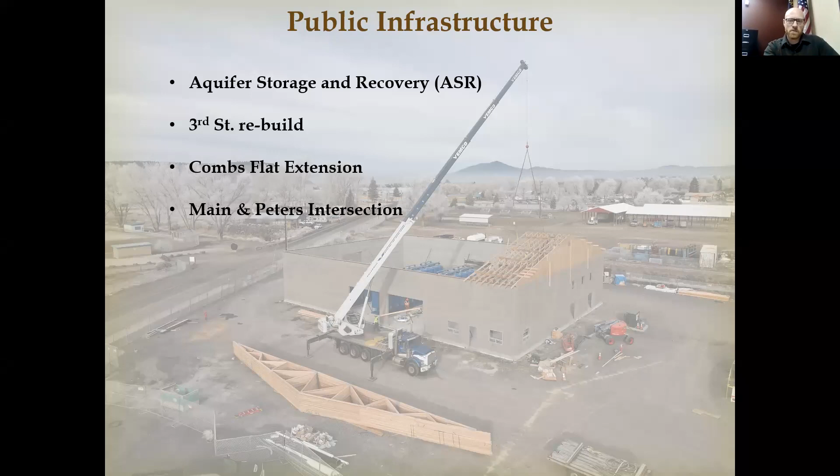But we don't have typical customers here with the data centers. They require a lot of water at very short periods of time. They don't use a lot of water, but when they do, it's a huge spike, and we need to be able to deliver that water and have the capacity available. So what we've created was this aquifer storage and recovery system. You can see the building in the background being built. This is a treatment facility down south of the fairgrounds. There it is. That's what it looks like today.

It's a drone shot of a treatment facility, and right on the other side of the street is a series of 20 wells, 100 feet deep, and they supply. We push the water through here. We need the treatment facility to take the manganese and the sulfur out, and then this allows us the capacity to push water up the hill and bring it back down. We can now pump water up onto the grade. We can now let it into the town. It's more than just this system. We have pipes going up the grade.

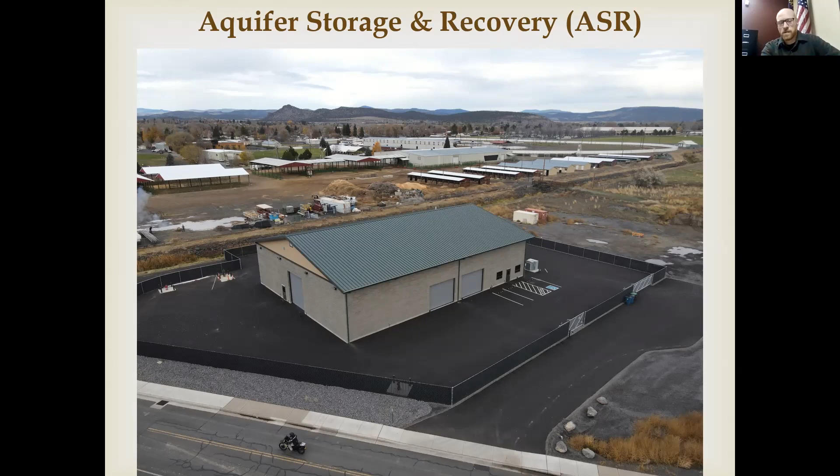But the key point of the aquifer storage and recovery was to provide water storage when we don't need the water, and then pull it out, recover it when we do need it. And so it's a very unique system. We've got a lot of different awards for it. It's not unusual. It has been done in other places, but it takes a very specific geology in order to make this happen, and we happen to have that here in Prineville.

So in the wintertime, we pump water up onto the grade and pump it into the airport wells. Our aquifer is confined, and so it actually balloons up. It creates a bubble underneath, and it allows us to store an enormous amount of water, where our normal water tank is 1 million gallons. That's a normal tank you see in any town USA. This has the potential to store 400 million gallons. Now, we may not ever reach that, but that is the theoretical capacity.

And in the summer, we can pull that out when the aquifer recharge is really low and the river's down, the reservoirs are down. We're using groundwater, not surface water, but that recharge isn't there. So we do slowly pull that water down. I don't know if you can see that on the side there, this is kind of a little chart, but the important part is you see all those lines on the bottom. Those are our yearly recharge. You can see how it gradually recharges over the winter, and then we pump it out in the summer, and then it gradually recharges again, over and over again.

What the aquifer storage and recovery does is allows it to boost. So that big green line is us pumping water into the ground. And then when we stop pumping, what we didn't want to see is that water drop all the way down to those normal lines. If that happened, that means the water's leaking out somewhere, and it didn't work. But it didn't. We actually saw it stop, and it held steady at a higher level. So this was 2 years ago. We test pumped this. This stored 34 million gallons.

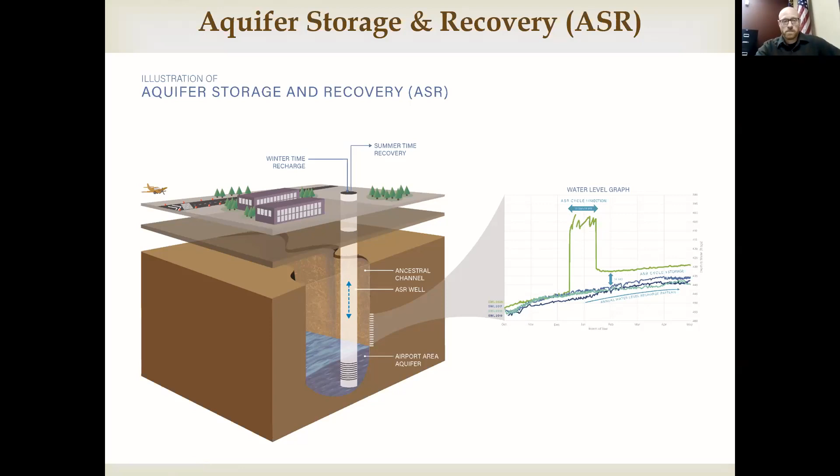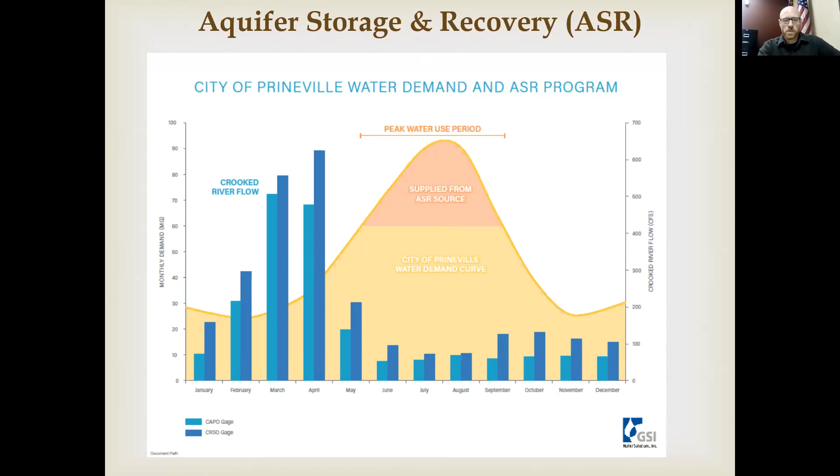But then they don't use water the rest of the time. It's just that we need that capacity to be able to serve them for that 1 to 2 days when it gets really hot. And so this allows us to take off that major peak, and allows our water system to serve other customers as well. So this system doesn't just serve them, it serves the entire community. It's a really interesting system. We're going to make it more robust. We're actually starting to pump into it again right now in November to build up that aquifer.

Next project is our 3rd Street project. If you notice in Redmond and Bend, pretty much every town in Central Oregon has done a Main Street project where they've beautified their community. Prineville has a very long highway through town. It's never really been upgraded, but ODOT does have a need to connect the signals, signal timing. So they had a project. They have to do a lot of ADA ramps and things. So these projects kind of coalesced. We got money from the legislature to do some pedestrian enhancements.

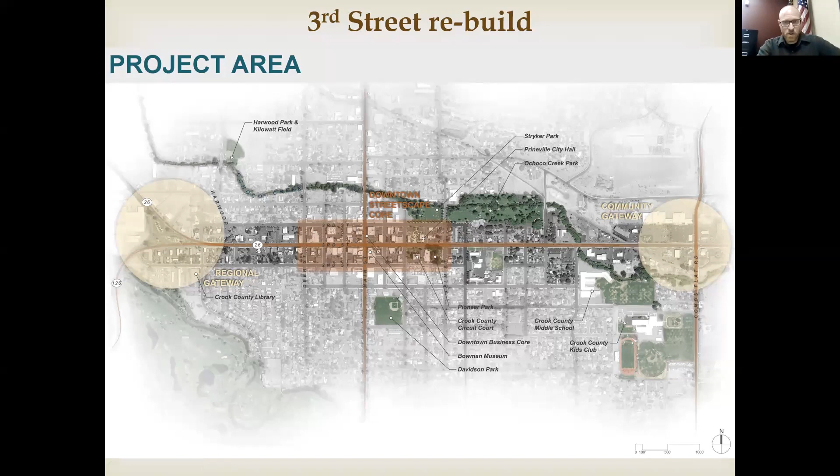And what we're trying to do is put together a project primarily from Harwood to Elm. It's actually going to go all the way out to Combs Flat for the signal timing, those yellow circles on either side. The beautification would be concentrated more in the central part of the community. The funding for this is becoming difficult because it's such a large project, but we're still working through it with ODOT. We actually do have a design.

Part of that design is the streetscape design, where you add in all new sidewalks, curbs at the intersections. You do more of a bulb out, kind of enhanced pedestrian crossings. You get some street trees, some pedestrian lighting instead of the large cobra heads and overhead lighting. We would bring that down. We already have an example of that lighting on our 4th Street, where the parking lot is. Those lantern style pedestrian lights. That's what we're going to use. They work really well. I think they shed a lot of light, and it's attractive.

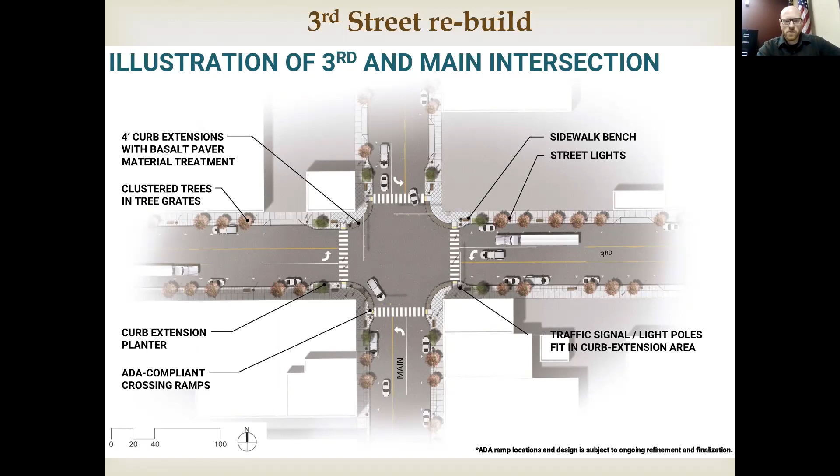What it does is it just pushes people out so that they stay in their lane and they don't hug that curb. Whether you hug that curb or not, you're going to roll over that curb. So on 3rd and Main, for those who live in Prineville, you notice we have those candlesticks, those orange cones sitting over here. They do the same thing. They're just pushing people out in the traffic so they don't roll over the curb. But that actual turning movement isn't any different with a bulb out. It's designed to be the same.

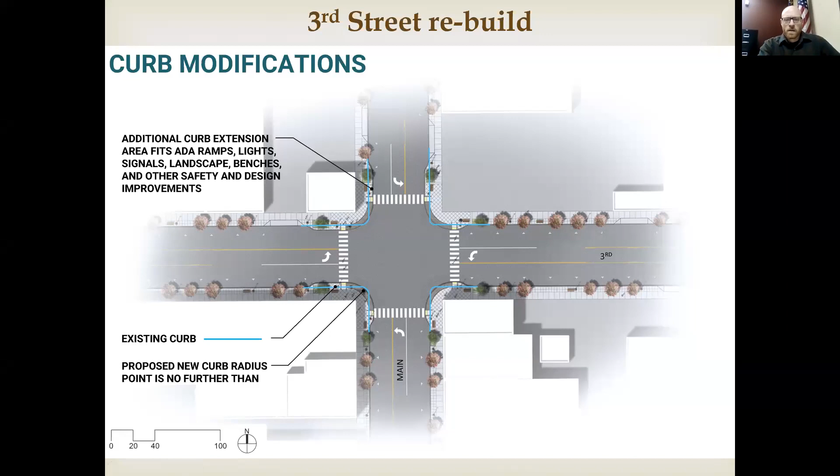And then this is just a conceptual drawing of what we hope for. Probably won't have the rain garden planters, but street trees, the lantern style lights, improved pedestrian crossings at the corners, maybe some benches and garbage cans that match everything would be the ultimate goal. This is probably a 2-year project, 2 years out. The funding is becoming an issue because the prices of things have gone through the roof. Concrete, piping.

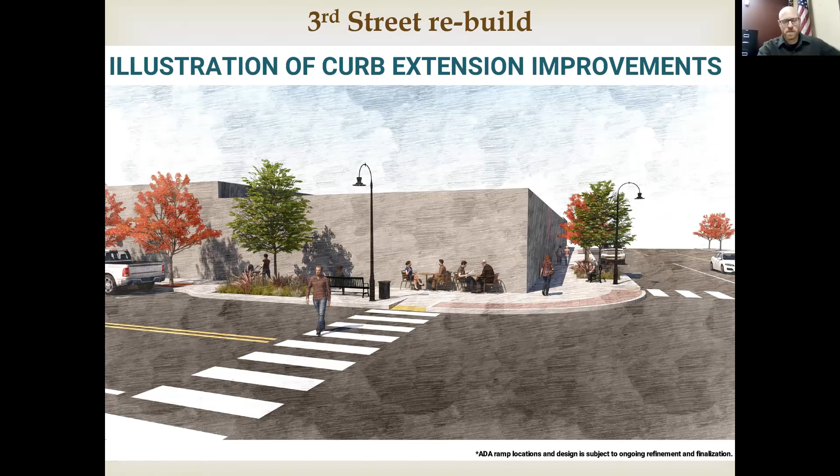We've got a whole drainage system we're trying to fix with this, and we're hoping that when it actually gets to construction, when we actually go to bid, those prices have come down by then.

Third, Combs Flat. So this is probably our #1 project right now in the community. It's a large project. This would connect Combs Flat to Peters Road on the east side of Prineville through the Iron Horse project in what is now the city's Barnes Butte recreation area. This is a long time coming. It's been in our transportation plan for a long time.

It's now coming to fruition primarily because OID, the irrigation district, has a need to pipe their canal due to the McKay project, which is a whole other issue. But they're going to be in there next year piping that canal. They have the money to pipe it. So they're going to take this open canal out. Actually, the canal will remain for the most part. This portion will go. They're going to pipe that.

We thought, hey, let's combine the project, save a little money, and we'll get that pipe in the ground, put a trail over it, make it part of our street, and we'll get this connection done. Not funded yet on our side. The OID piping is funded. So we have a design. This is kind of the route.

And the ideal concept basically is, because of the Barnes Butte rec area on one side, everything on the west side in these colored shaded areas would be designated for what the Iron Horse plan was originally for, which was housing. So this would most likely be developed all in here. It's not going to be part of the park. And then Combs Flat would be the dividing line. This will still remain part of the park. This is all wetland and trail systems.

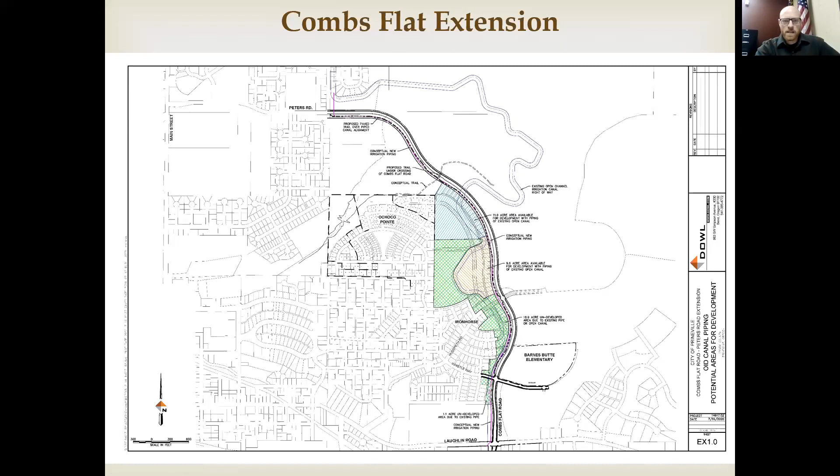And the last one is our Peters and Main intersection. This has been a problem for quite a while. It's got a property on the east side here that, in order to open up proper development for that property, this needs to be realigned. This is our current conceptual plan, by no means a final draft. So don't take this to heart and start publishing it in the paper or anything.

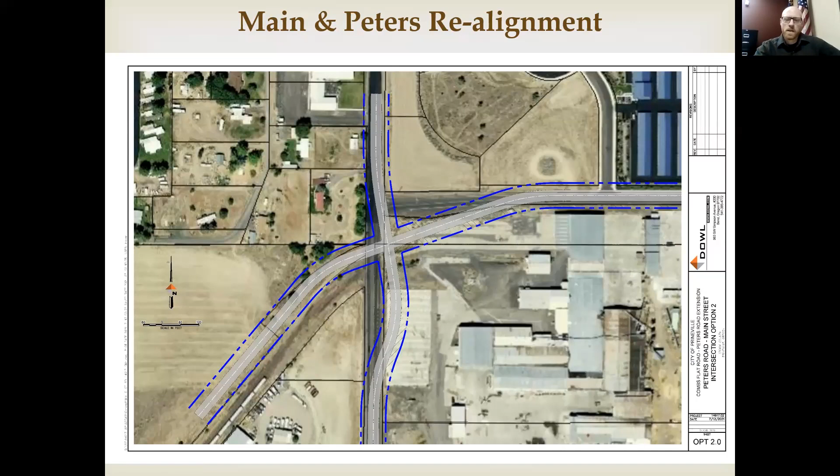But we are in the process of getting right-of-way acquisition from the mill. And the idea is to realign Peters so that we can create a four-way intersection. This will be a lit intersection, not a roundabout, primarily because of the rail crossing. It still needs to be there. It's still an active rail crossing. And with this signal and realignment, which we have some money for right now through the legislature, it opens up that east side property. It also opens up, combined with the Combs Flat project, this northern route.

So this is an image of our transportation systems plan. You can see the dotted lines are Combs Flat coming up. Here's the existing Peters Road. Then it connects over. This is not necessarily the route. It might go down the track. It might come across. There's a lot of different routes it can take. But the idea is to get it connected over to Gardner Road. And this becomes an alternate path for the northern part of town.

It also becomes a good truck route for the two mills, Indura, Old Contact Mill, and what is trying to redevelop with the wood grain, so that we don't have that traffic coming down to our new 10th intersection and bogging that down, because 9th Street is currently not through yet. So this would provide that alternate access. So that's the ultimate goal there.

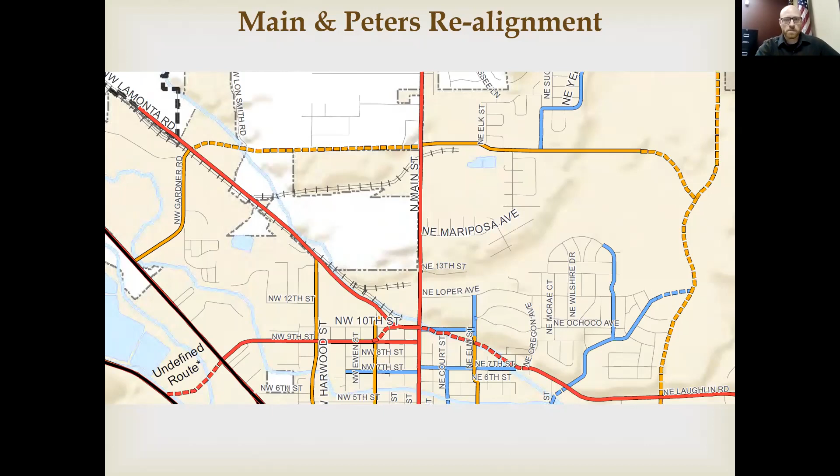Large projects, very expensive projects. We do have other improvements, water systems, normal paving projects that go on, but these four are probably the highest and most expensive ones that we're currently working on. So with that, we'll move on to our parks. This, like I said, is something that I think a lot of people are very interested in.

It's what brings people to communities sometimes. You know, they always look for that amenities. What do we provide in the terms of recreation, and where do we provide it? Is it near to home? Is it walkable? Can my kid walk to school? Is there a park available for them to play in, or do they have to play in the street? We get that a lot.

So I got several here. The first three are primarily city, and then the last four are actually through Parks and Rec. I wanted to show, for some of those who aren't aware, this is our Prineville wetland. It's a little video we put together in 2019. This is a functional wastewater treatment facility. It's also built to be a park.

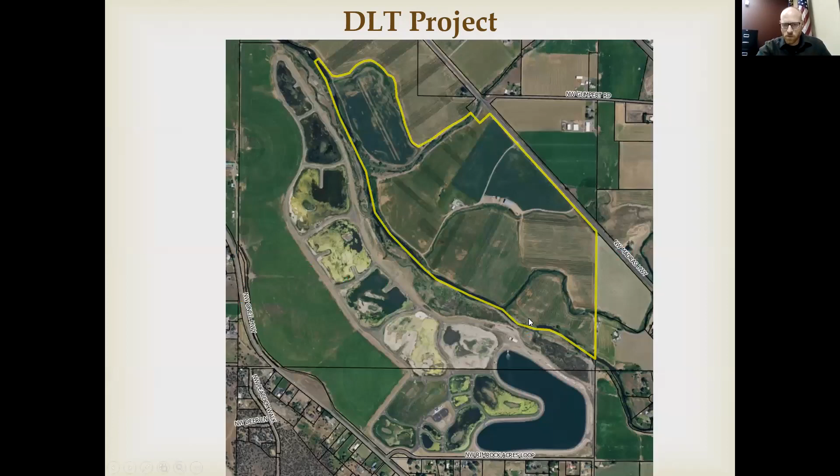You can see a little bridge down here in the corner. They've designed their plan to accommodate a bridge crossing of the Crooked, and we've accommodated on our side. Most likely that's going to be right here. Then they have trail systems that work through their system. Ultimately, we'd like to have a trail connection into the city off the O'Neil Highway. This would provide an off-street trail that connects.

Our trail system currently ends at the Presbyterian Church on O'Neil Highway. It'd take another mile and a half to 2 miles to get here. We can probably partner with ODOT to get that extended. It would create an off-street path connecting this system and our wetland system on the other side, where currently, if you want to visit the wetland, you have to drive. It's not very walkable, not very bikeable.

O'Neil is very narrow, so this is an opportunity. We worked with Deschutes Land Trust to provide that trail system and that crossing, and they were amenable to it. Hopefully we can get the funding, eventually make that happen, and work with ODOT to get our trail system connected. That would open this up for all types of use.

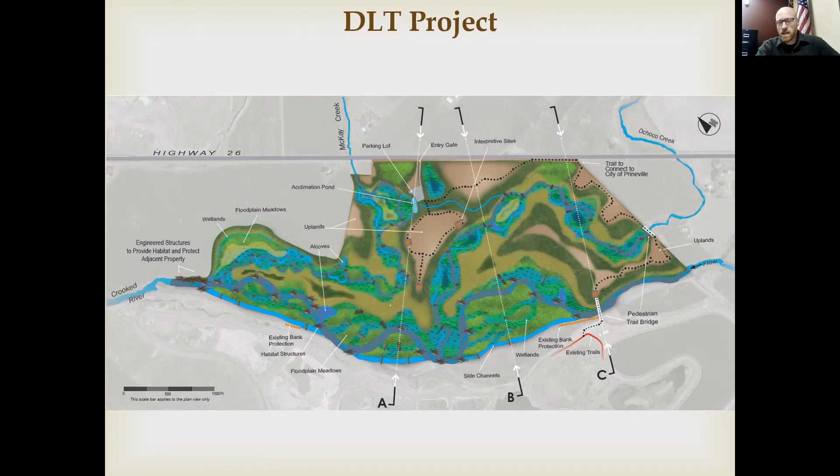The next one's Barnes Butte Rec area. I kind of mentioned this earlier with Combs Flat. This we purchased in 2016, primarily for the water rights that Brooks Resources owned, and protection of Barnes Butte, protection of the wetland area we have there, as well as the ability to build Combs Flat when we need it. Otherwise, we would have to wait for development to do so.

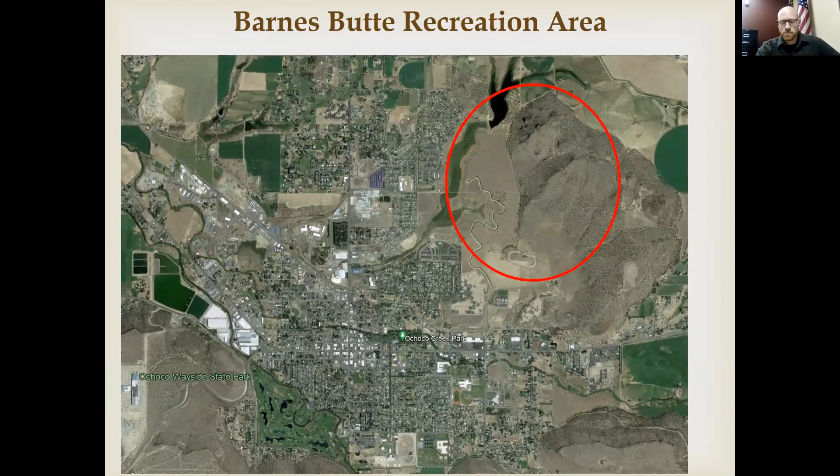This is a concept plan we put together with the council. They adopted it last year. Very conceptual, but the idea is to primarily leave it natural and provide trail systems. Currently, it is open. Anybody can go out there. There are trails out there. There's not a whole lot of signage or anything like that. It's just kind of a very natural open recreation area.

The BLM actually owns the top. So there's 160 acres up here. That's Bureau of Land Management. It's public, so public to public. We just use it as if it's part of our park. Primarily, all development will occur down here in what we call the hub, what some people are calling Happy Hour Plateau on the track.

And we are currently in process of developing a refined plan for this hub area with some architects and creating a visitor center, an event center, not huge, not like the fairgrounds or anything, but a place where people could have workshops or could have large venues or even do weddings, stuff like that. And then add the visitor center and even the chamber to that is the concept right now.

The track becomes a walking area, maybe do something on top on Happy Hour Plateau, maybe put in an amphitheater somewhere, maybe fill the pond and actually use it as a fishing pond. There's ideas of using it as kind of a beach area. I mean, there's all kinds of unique ideas and concepts that we can do with this that we're trying to put into an architectural plan that we can then sell and start doing fundraising for.

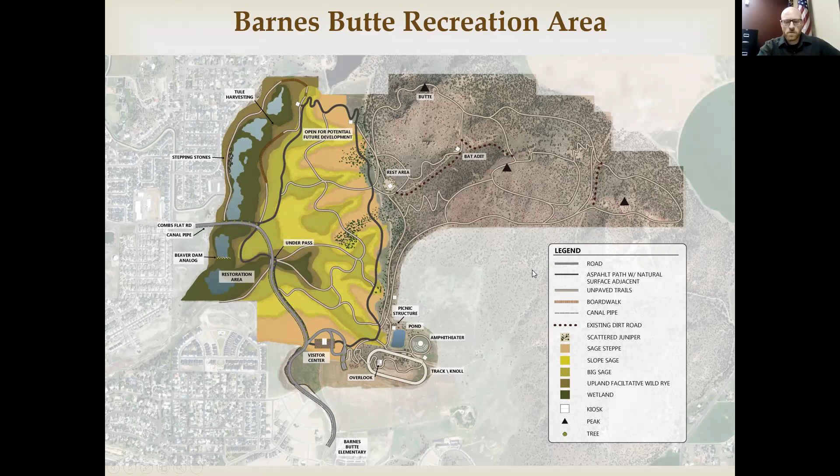You can kind of see the idea of Combs Flat coming through and all the trail systems and how they connect, and then an enhanced wetland system through the area. And then this is an old slide, but we just did recently get a $200,000 grant from State Parks to do the paved loop trail, which, if you can see, is actually in here, that black line in the concept plan. And so that is going to happen.

And then we have a bridge that should be going in this month over the wetland there. Right now, there's just a little wooden bridge. This would connect the Polish neighborhood with the Stone Ridge Terrace neighborhood. And the trail system would eventually enhance connection to Northridge. And once Combs Flat is done, we'll have the connection all the way down into the school and the Iron Horse, and we'll have connections over into Polish in multiple areas.

And then hopefully as this whole site develops, we'll have multiple trail systems coming in. But this is kind of the first go. We also acquired some property over here from Housing Works, and that will become more of a parking lot trailhead for kind of that northern area. So this is shaping up pretty well. It's going to be a long-term plan, but we're slowly picking away at it.

That's going to be kind of a main attraction. We're kind of going for that state park look, kind of that state park feeling, more of a regional thing that people will want to come to, but also make it very accessible to the community itself through those trail systems and a walkable, bikeable kind of idea.

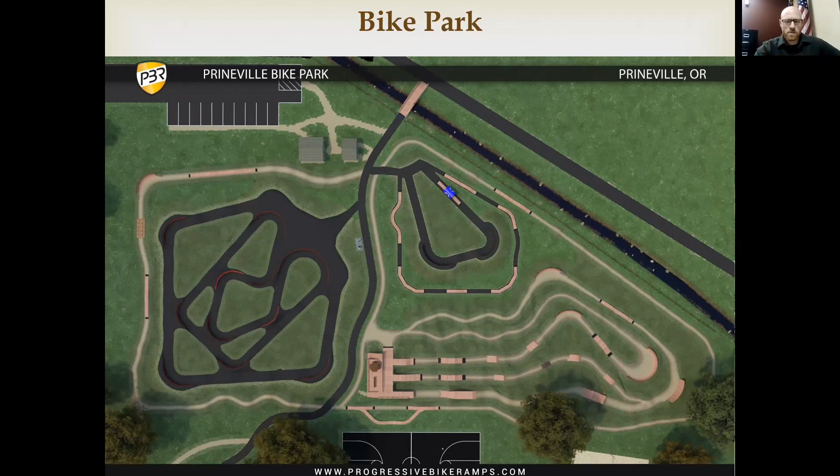So when they plan on building it, I don't know, but it's a great amenity. You've got a housing project developing right across the street, the skate park that was just redone, and the pickleball courts that were just redone. They're even looking at the Creation Station, the Castle Park, seeing if they can rehab that one, and then still create all these trail connections. So that's really awesome, kind of a unique idea here.

The next one, just across the creek and down the way, is the Stryker Park. This is directly behind City Hall, right next to the fire station and the new splash park.

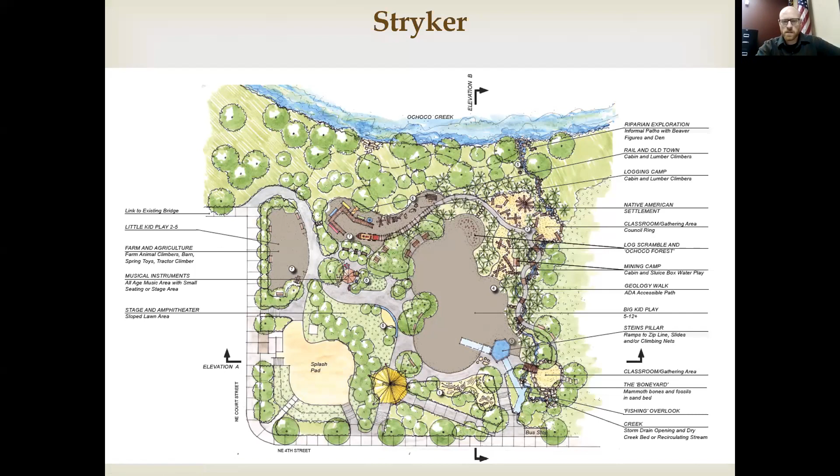This is a $1 million park. I think Dwayne and the Parks District are going to start fundraising for it, and it could become a reality. This is already owned by them - they already own the property. They just need to get the funding to construct it.

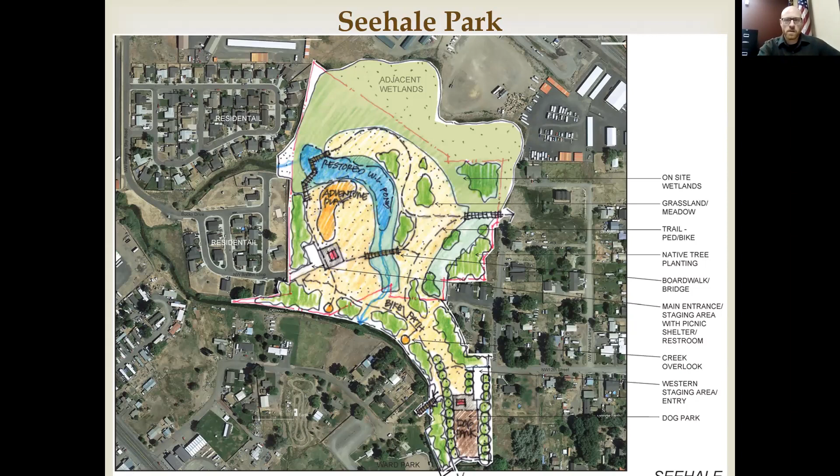And so as things develop, we try to look at ways to make those connections, either through property dedications or easements, to make these connections happen, so in the future they can actually build these trail systems. And that's how we got a lot of the trails we have today—just through the slow grind of development and getting those things through.

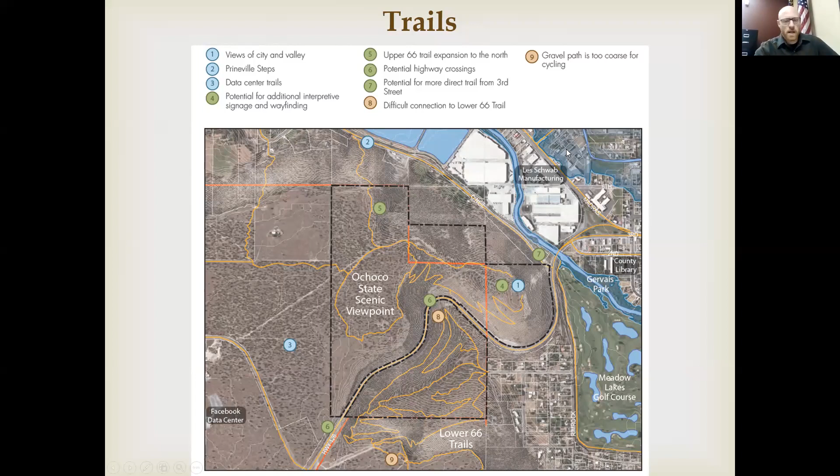And with that, we'll move on to the building side of things. There's three main projects: the old police building, which we've abandoned now, that was city; the museum expansion; and the courthouse.

The police building is an old 1950s defunct structure, right there in the middle of town, right next to Pioneer Park. It's not being used for anything now. It needs to be torn down eventually. But what do you do with it?

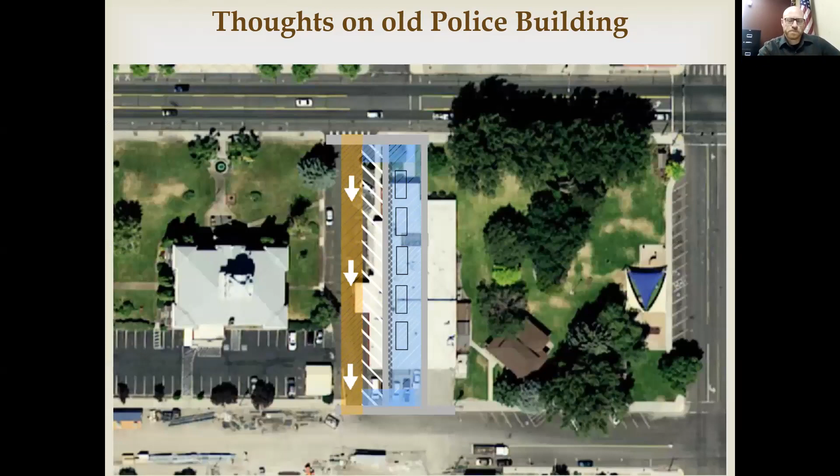We could use some more parking on the county side, yes, but the idea would be, I drew up a little concept. This is kind of what we've been batting around. This is by no means, we haven't even discussed this with council yet. So this is an idea that we as staff have been pitching.

This is a real crude drawing, but the idea would be to keep that road one way as it is today and add angled parking all the way down, most likely add some EV stations, so electric charging stations, which we currently don't have in town, some fast chargers, not the little Type 2s, but some DC fast chargers. Then create kind of a barrier and expand Pioneer Park and create a vendor area where, when we have our picnic in the park and our events over there, instead of having vendors parked up in the parking lot and clustering around the outside, we could have an area where maybe they're food vendors, maybe wares vendors, whatever it might be, but with power, sewer, water hookups right there.

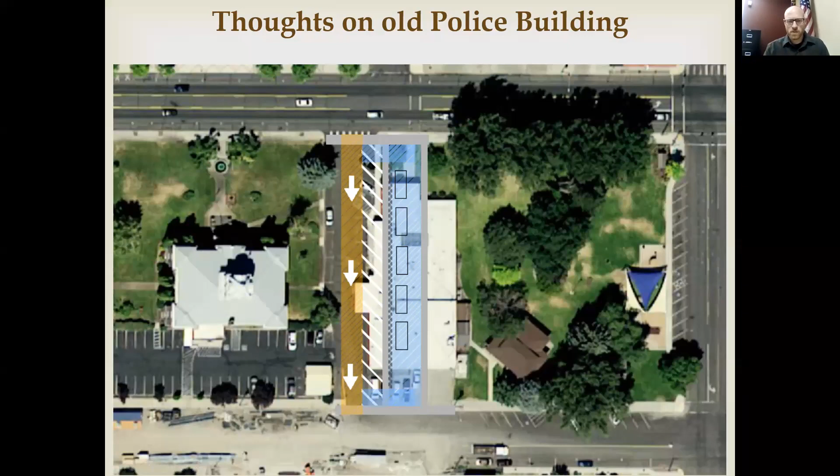Put sidewalks, kind of make it central to the town, make it more attractive. Again, trying to bring that concentration of people into town so that they don't just grab and go, they actually stay, which helps out the business community. So that's kind of the concept here.

This is pie in the sky right now. There's no plans to tear the building down right now. There's no money to tear the building down right now, but that is kind of what we're thinking. We're trying to push that rumor, so maybe it happens.

What they'll use it for is traveling galleries. It'll be more their place where they have things that they interchange, whereas the current museum is more stationary, things don't move, it's always the same. This would be the area where the museum can have different exhibits and constantly rotate things through, making it more attractive for people to keep coming back.

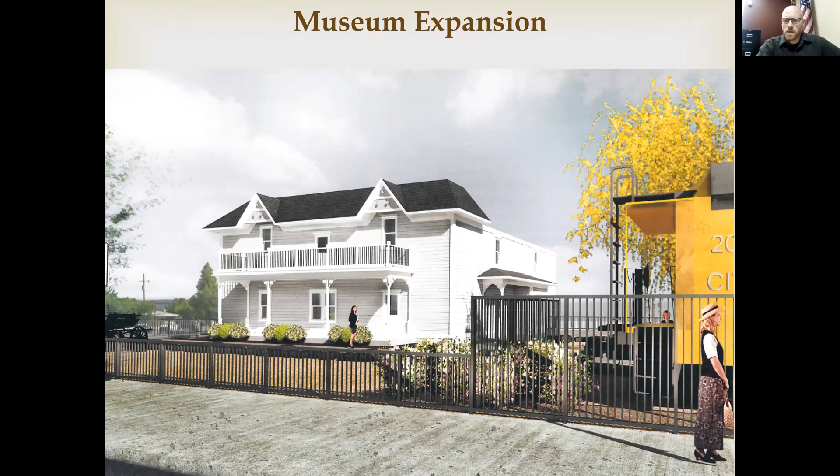And then lastly, the courthouse. For those of you who live in Crook County, you saw this on the ballot on November 2nd. You might have seen the little quotation, "Save the courthouse," kind of like the old Back to the Future, "Save the clock tower." The courthouse is old. I think it was built in 1909, and it's been used as a courthouse for that long.

We're not replacing this building. We're moving the uses to another building that we plan on building. That's what the ballot was all about, what the bond measure was about. And then we would use some of that money, or it would free up other money, to actually help restore this building to be used more locally for the county court, planning commission, very minor uses, and actually restore it. It's more of a museum piece than having all these uses in there that it's not capable of serving.

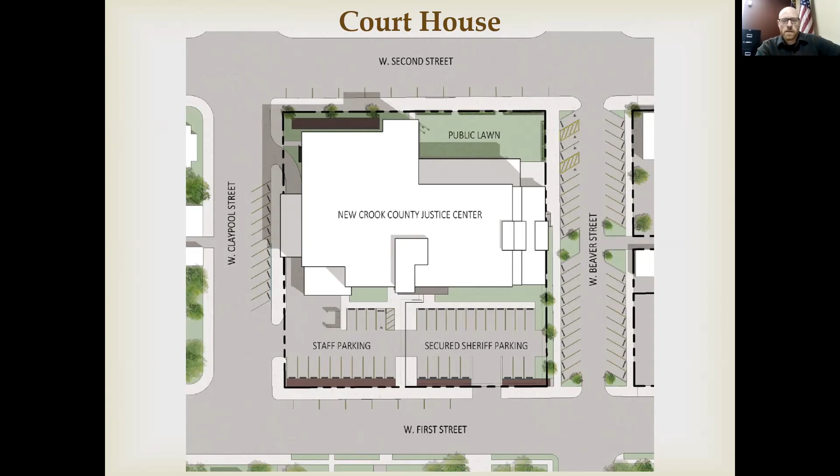But I imagine everybody around it would be pretty excited to see something go in there rather than the growing weeds and an occasional truck that pulls in there and parks. And then this is the conceptual design for that structure. If you haven't seen it yet, this is kind of what they're planning on building. And hopefully we get there. Since the bond passed, it looks like we are going to get there. And they will go through public hearings, I'm sure, with the planning commission here at the city to get it approved. But this is what the county is looking at doing on that block.

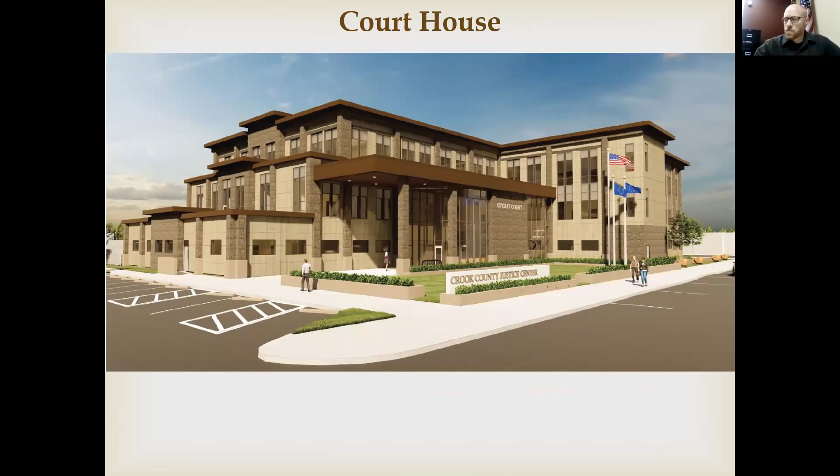So with that, I will go to questions. It looks like we have quite a few. Hi, yes. First of all, I just want to jump in real quick and say thank you so much, Josh. That was awesome. So much great information in there. And we do have lots of questions already coming through and some great feedback.